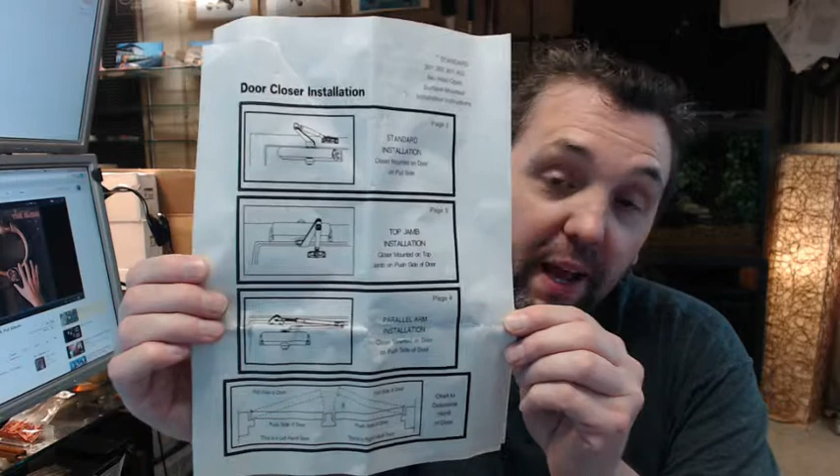So there's a link below this video to the instructions, and it shows immediately what page to refer to depending on the installation. So a standard installation is also called regular arm, and you would go directly to page 2. Page 3 is top jamb.

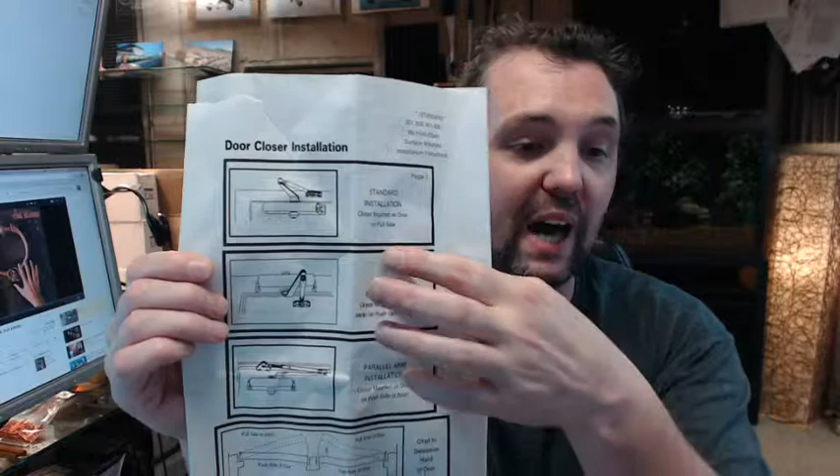That's where the body is mounted on the header, and the soffit and the arm shoe is mounted on the face of the door. Very typical installation that you're going to see in out-swinging doors where the closer has to be on the push side of the door and you're not using the parallel arm bracket.

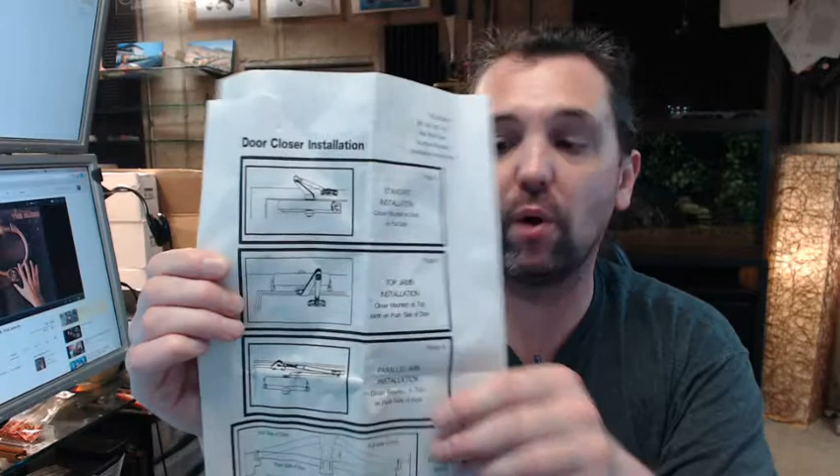And then speaking of parallel arm brackets, the PA or parallel arm installation is referred to on page 4, where the body is on the door on the push side and the parallel arm bracket is mounted to the underside of the head. Now, page 2, 3, and 4, there's only 4 pages to this installation. Page 1, page 2 and 3, and then page 4. You just jump directly to the installation aspect of what you're dealing with.

And I'm not going to go over all of the installations of all 4 of these at this time, but only to say that the important thing that you have to know when installing a door closer is determining the degree of opening, how far you want the door to open, is directly related to the placement of the body of the closer in the installation.

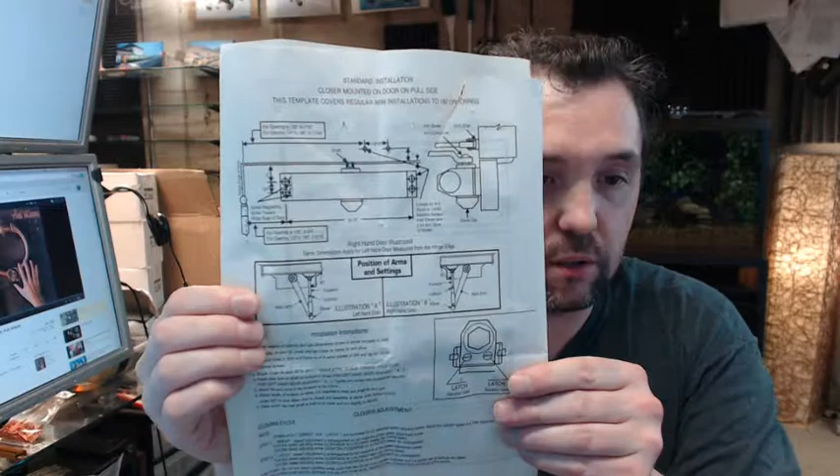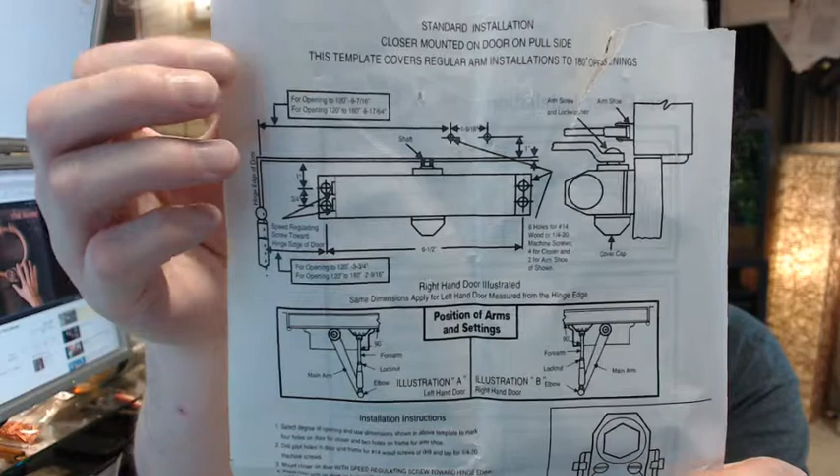Just using the regular arm on page 2 as an example, and this applies to all of them - basically, the instructions say, for openings to 120 degrees, you want to have the dimension here, but the center line of the hinge that we're talking about is down here. For openings to 120 degrees, you're going to have a dimension of 3 3/4 inch, meaning from the center of the hinge to the center line of the screws is going to be 3 3/4 inch.

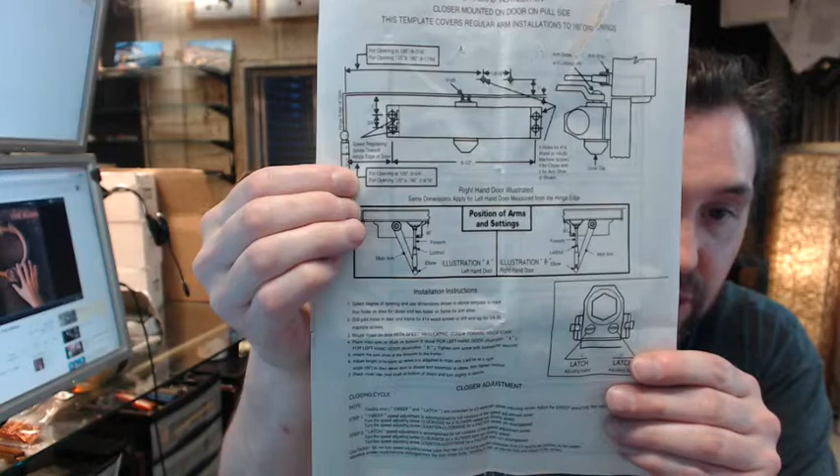If you want to have an opening degree of 120 to 180 degrees, you're going to move that effectively closer to the hinge and make it 2 9/16, meaning the body will be closer to the vertical axis of pivoting or the center line of the hinge, allowing for the installation to open up beyond 120 degrees.

All of the 3 different installations that you could possibly encounter are all going to be using the same principle. Another principle that is identical to that is this fact: the side in a regular arm with the control valves goes towards the hinges.

Okay, that is going to be the same for your top jamb mount, but will be opposite for your parallel arm. So you can take this body and install it with these sweep and latch valves towards the hinges or away from the hinges. If it's a regular arm or a top jamb arm, you install the body so that this end is towards the hinges. If it's a parallel arm, you install it the opposite way.

It's called out that way in the instructions, so it's not going to be difficult to make a mistake in that regard. Once you know the vertical line, how far away the body is from the hinges, you're also going to reference the dimension from the top of the door to the center line of this first screw. At that point, you're going to have the rest of your dimensions.

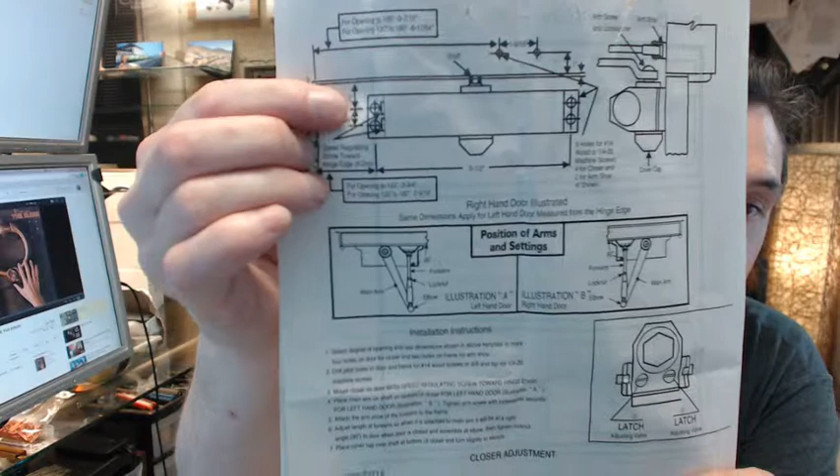In the example of the regular arm, it's 1 inch, as you can see there. Okay, it's a 1 inch dimension, top of the door to the center line. So down here is the first important dimension, and then up here is the second. Everything else is going to fall in line from that sort of condition that you're going to have there.

Now, what I have found is that in the installation where you're doing a parallel arm, this is going to be your sweep valve, meaning when the body is turned away from the hinges, this is the sweep valve.

The lower one is the latch valve. When this is towards the hinges in a regular arm or top jamb arm, you're going to have a sweep down here and a latch down here.

Now what those valves refer to is the first 5 or 10 degrees of the opening or closing cycle. That's called the latch valve area. Past about 10 degrees out to about 90 is your sweep. So the one valve will control it out here, and then the second valve controls just the last few degrees, called the latch valve. And that's a very universal sort of situation.

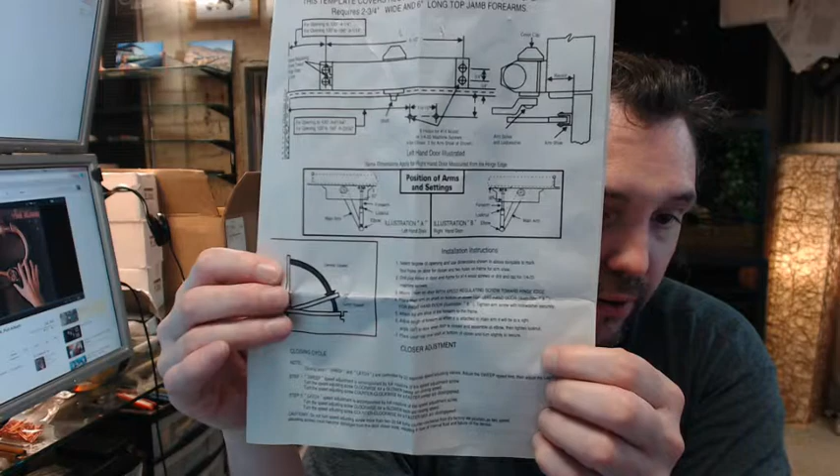And in addition to that, I spell it out in detail right here, what I just explained, using those 2 dark arrows that you see there.

Instructions on how to adjust the valve: clockwise is going to close the valve, so you've got a slower amount of travel or a greater amount of control over the situation.

And you'll find that when you're adjusting those, which is a very common thing to do, as the seasons change, as air pressures change, as the use of a building changes, meaning you might have doors open a lot more, so wind will come through the building at a different rate in the opposite season, you'll have to adjust those. And it's nice that these closers include that sort of adjustability, even though you do have to adjust it over time.

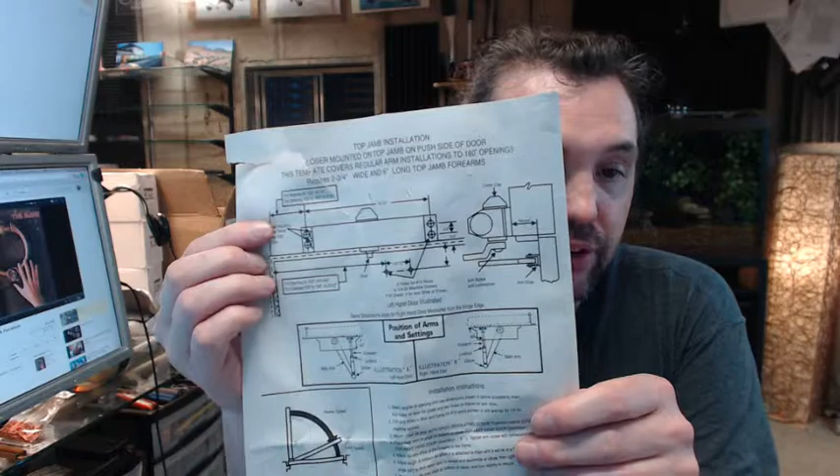Looking at the top jamb mount, there is nothing new to really address there outside of what we've talked about regarding the placement of the body. You do want to make sure that you've got ample room to get the body installed onto the header of the frame. So this is a top jamb, it's page 3, it's where the body goes onto the header. You're going to want to make sure you've got ample room to get that all installed.

And it's really shown right here in a cross section what it's going to look like. Top jamb is a really good method of installing door closers because the door closer is very efficient at doing its job when it's top jamb mounted or when it's regular arm mounted. And what's nice about the top jamb is that you get the body out of the way.

There's nothing hanging on the door. If you have a regular arm mount and the door opens in, you've got that body mounted to the door, so you don't want it to come in contact with a perpendicular wall. When you top jamb mount it and put it on the opposite side, there's nothing in the way to hit the wall.

Now, the parallel arm installation is by far a very common sort of installation where you've got the body mounted, and that's on page 4 of the PDF below, where you've got the body mounted on the door on the push side, and then you're going to employ this parallel arm bracket, mounted onto the header.

In that sort of situation, you lose this bracket. You lose it in the sense that you remove it. Then this hub here mounts directly to the pin here and makes that sort of mechanical connection. Okay, so this shoe goes, and then you install the forearm directly onto the parallel arm bracket.